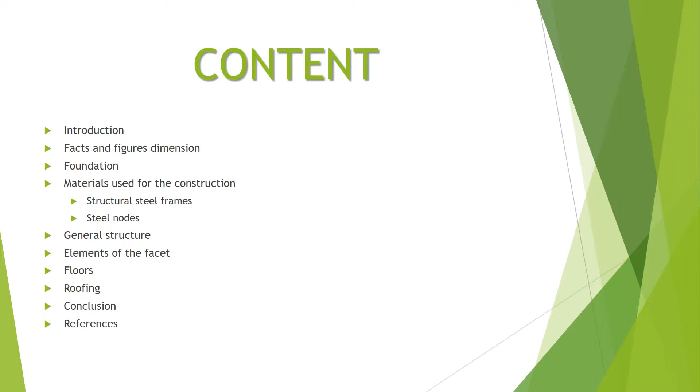This page is the content page. It introduces us to the whole presentation. I start with the introduction, followed by the figures and facts of dimensions, foundation, and also material used, which is mainly steel frames, and followed by general structure, elements of the facets, floors, roofing, and then finally the conclusion and reference.

30 St. Mary Axe was designed by Foster and Partners, Swiss Re, who are the owners of the building, and the main contractors were Skanska, and also Arup was the civil engineering company that supported the structural work of the building. This building was completed in 2003.

For this presentation, we'll be looking at the outline of the structure of the building, the type of foundation, materials used, and also sustainability of the building.

This page is to present to you the key facts of the building. This is a very big building situated in London, and the height to the dome above ground level is 179.8 meters. It's got 40 floors, and it's got a single basement.

The floor area covered by the building is 47,950 square meters. And it's a multi-functional building that has got different activities going on there. We've got offices, we've got retail sector, we've got areas for gym, areas for meetings. So different activities actually go on in this building.

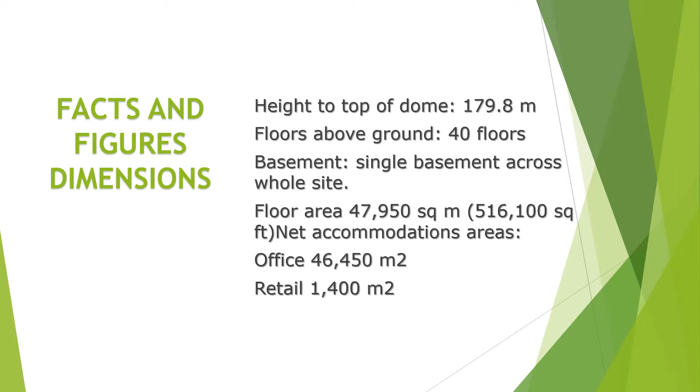Looking at the construction technology which was used to build this building, by first considering the foundation, it comprises of 750 millimeter diameter straight shafted piles. The number of piles were 333. The total design capacity was 117,000 tons. All piles were done on the same day.

And the reason why the pile foundation was used is because of the nature of the soil. The soil has got very low density, and due to that, you have to dig the pile to be able to meet the high density soil so that it can hold the load of the building, and it can hold the structure in place. And this is the best way to go about a building like this.

This is how it was constructed. Although the picture here is not exactly the piles, it's a similar one, just to demonstrate how the pile was done.

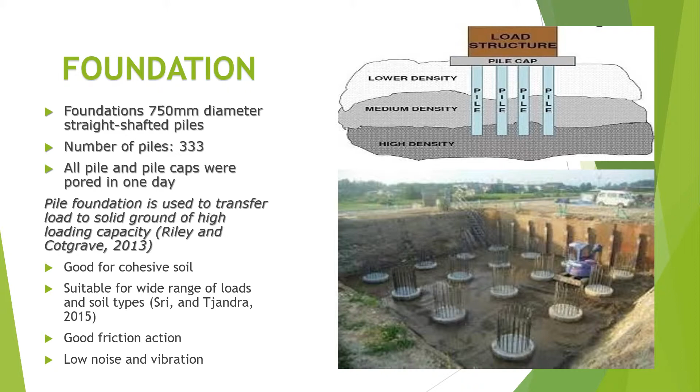The reason why the ground level columns were thicker: the ground level columns to level 2 were 508 millimeters, and then level 36 to 38 was 273 millimeters, because the ground floor column was thicker to hold the weight of the building in place and then transfer it to the foundation.

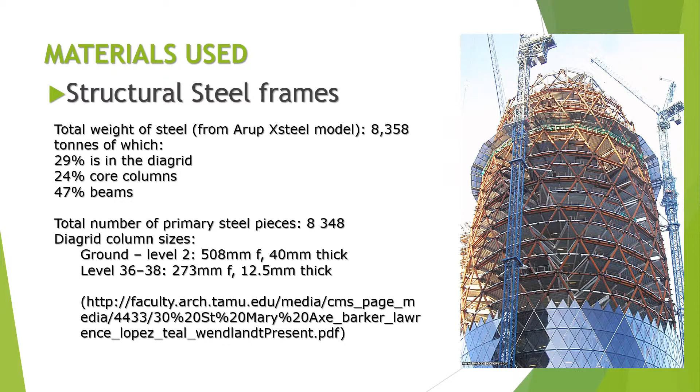So the diagrid, if you look at it, is the diamond shape, as it is in the picture, and this also holds the floors, and also the glass cladding, which was attached to the building. And using steel was very effective because steel is very light and it can be easily assembled as well.

If we look at the advantages of using steel frame, it can be easily assembled and it can be done faster. We can have long spans, and also it can support the weight of the building directly onto the foundation.

It has a superior strength to weight ratio. If you look at the size and also the weight, because it's a tall building, using steel frame reduces the weight of the building. And also it's got greater resistance to rot and fungi attack, and even distribution of weight.

And the floors were laid on top of the steel frames, which actually supported them evenly and spread the weight of the load directly onto the foundation.

Steel frames are also easily transported. So with that, if you look at the amount of steel frames in the building, they were all transported directly to the site without any constraints because of the size of each steel frame.

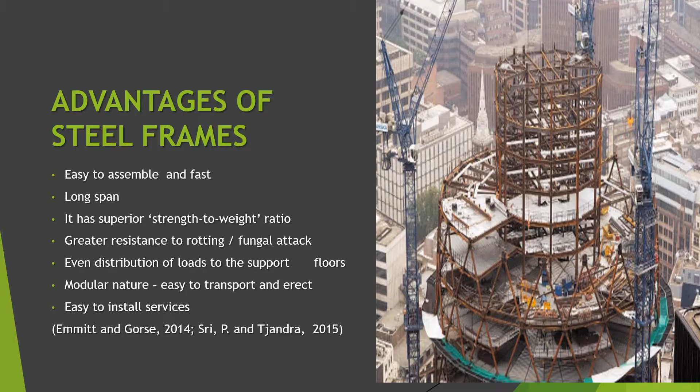This is to demonstrate the design of the steel nodes, which serve as a connector to connect the various parts of the building together without any constraints. If you look at it very carefully, the 360-degree steel nodes were prefabricated in the factory. The steel nodes connect the complex diagrids together and also hold the floors in place. And with this, it helps to reduce the amount of columns in the building.

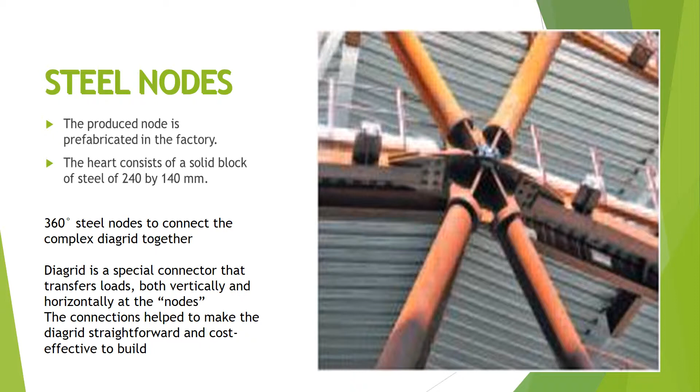With the design of the diagrid and the steel nodes, it helps the diagrids to be connected straightforwardly and is also cost effective for the building. This slide demonstrates the elements of the facade. So if you look at it very carefully, we have openable glass screens and perforated aluminum louvres as internal sun screens, and also a column casing in aluminum.

We have a facade frame of extruded aluminum, and if you look at the whole building, the cladding covers 24,000 square meters. Because it's all cladded with glass, they're able to get a lot of sunlight into the building, a lot of daylight, and in a way it's sustainable for reducing the consumption of energy. And you can easily see through the glass and look outside because the whole thing is cladded with glass.

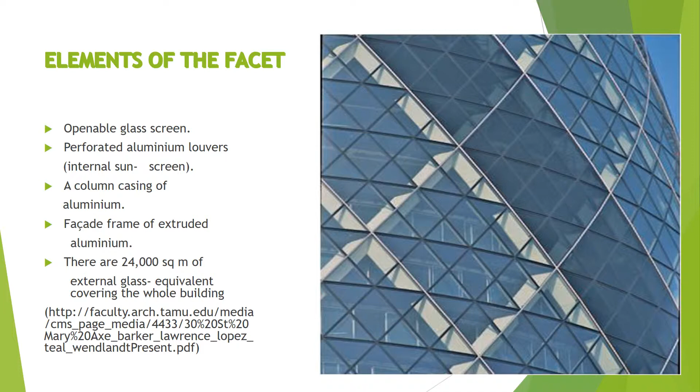Looking at the general structure of the building, the diagrid exterior structure resists the buffeting from the wind, and also holds the building in place, which helps to reduce the number of columns used in the building. And aside, there are a lot of big office spaces to be used.

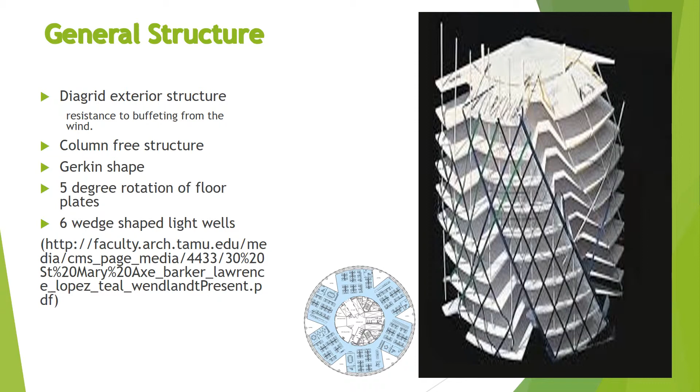Also, the Gherkin shape of the building is environmentally friendly, which allows free flow of air around the building. If you look at the 5 wedge rotation shapes and the 6 wedge-shaped light wells, and also the 5-degree rotation of floors, this allows sunlight penetration into the building and also free flow of air. And in a way, it helps to reduce the energy consumption, as there is free flow of air in the building. It's actually sustainable and environmentally friendly, which allows free movement of air into the building.

The floors of this building are mostly visible and were constructed with concrete slabs supported by steel frames. The diagrids provide vertical support to the floors, which allows free office space. And aside, there are big office spaces without any interruptions. The visible floors break down the barriers. Like if you stand on one floor, you can see the other side and the other floors as well.

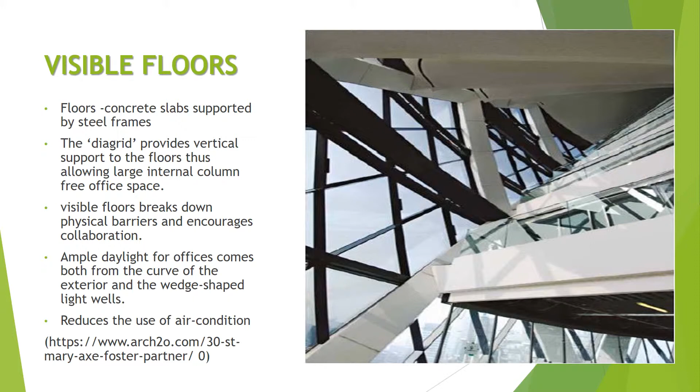And because the floors are visible, there is an ample amount of daylight which can come through to the building, and as such reduce energy consumption. And with this, the level of air conditioning used is also reduced, which is an effective, environmental and sustainable way of reducing energy.

The roof of this building was constructed with steel frames as well. So as you can see from the picture, we have the vertical and the horizontal connections, which are mostly the diagrids. They were connected to the top of the building. And as you can see from the dome, it's all an open space. So there is no actual coverage. The coverage is all glass, which allows a lot of sunlight and daylight to go through the offices at the top.

And the way the top of the building has been constructed, you can have a 360-degree view all around the city. As there are no partitions, you can go all around and have a look at London City with a 360-degree view. And because of the way it's been constructed, it gives a lot of daylight as well, which helps them to save energy.

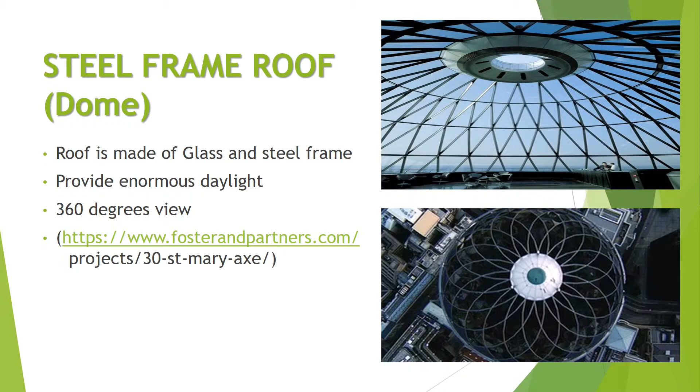Looking at the sustainability of this building in general, the way the building has been designed has got a big impact on wind, and as such, the pressure of wind cannot directly affect the building as it can wrap around it. And also with that, this restricts the movements of the tower, because with most tall buildings, if there is wind pressure, it tilts to some degree. It can swing to some degree, and because this building has been aerodynamically designed, the wind can easily wrap around it, and then it reduces the pressure of wind on the building.

If you compare this to a square tower block in the same confined area where this building has been built, the pressure on it would be quite enormous because of the nature of the land, the size of the land, and also the surrounding areas. So the aerodynamic design used for this building is one of the best ways to reduce the wind pressure and the movement of the building.

If we look at the six fingers of accommodation on each floor, the way it's been designed also allows a lot of daylight and also free movement of air into the building, and as such they are able to save a lot of energy through a reduced number of air conditioners and also daylight coming into the building.

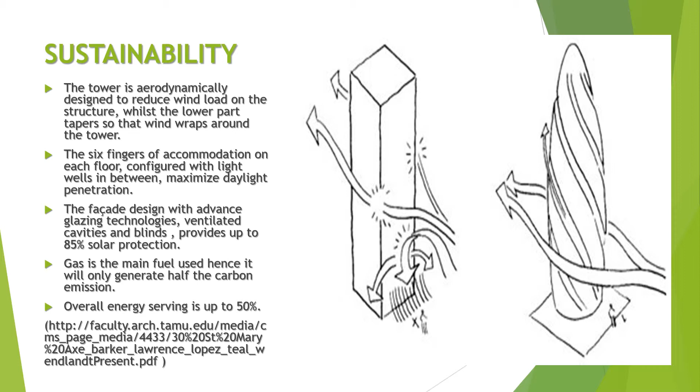Some of the obstacles encountered in the construction of this building were mainly location, soil type, and complexity of the steel frames. Looking at the location, the building is located at a very busy place in London, and with this, the construction managers needed to manage supply chain and logistics very well for the free movement of traffic for the delivery of materials. To solve part of this problem, all piles and pile caps were constructed in a day, which was a good strategy to reduce the amount of traffic.

Looking at the soil type, the cohesive soil type was not great, and therefore the best option was to use pile foundation, which can hold the load bearing capacity of a structure like this. Also, the complexity of the various parts and sizes of the steel frame was something which needed to be looked at properly. Bringing all of them together to form a structure like this would be very challenging. Although they were able to do it with their technology and expertise to overcome all of these obstacles to produce an iconic building.

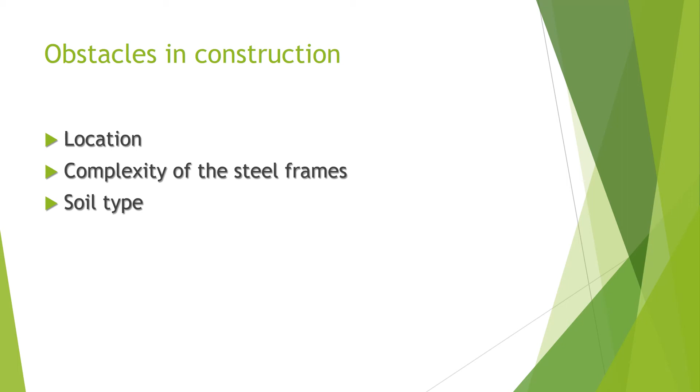In conclusion, 30 St. Mary Axe is an iconic building which has combined modern methods of construction and sustainability to produce a unique building, especially saving 50% energy, free flow of air, and natural sunlight in the building. The way the building was constructed with steel frames, glass panels, and the aerodynamic shape resists movements of wind and also wind pressure, which makes it a very unique building of its kind.